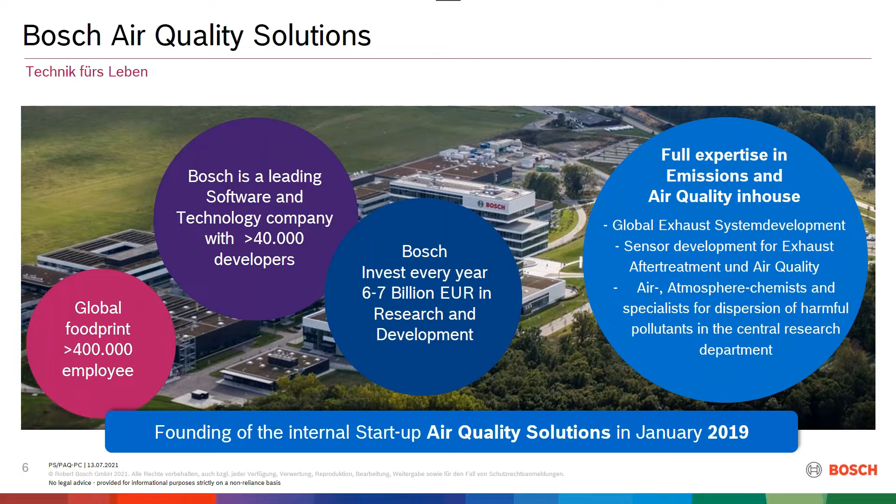In 2019, we had several projects in different parts of our company regarding air quality. We have our own exhaust system development, our own sensor development, and also air and atmospheric specialists are part of our central research. There were different products based on air quality, and we put all these projects together in the beginning of 2019, founding a so-called internal startup called Air Quality Solutions.

Within this Air Quality Solutions, we have three different products where we try to show, in regards of air quality, a holistic approach. What you see here on the slide is, on the left side, we have built up an emission model, what is really coming out of the exhaust pipe of every vehicle, which is now integrated in a first step in PTV Vissim.

But there is also an air quality box, which is a hardware, a sensor device where we can measure all harmful pollutants like particulate matter, CO, NO2, and so on, in a very accurate way.

And then in between there is the dispersion. So what is influencing the emissions, or describing the way from, let me say, the exhaust pipe to the measurement on the sidewalk. There is a dispersion calculation, which we call EcoLoop, where we calculate and model all influences from wind, weather, and air chemistry, so that we have a holistic picture coming from the sender, the emissions, up to the point where we measure air quality on the sidewalk.

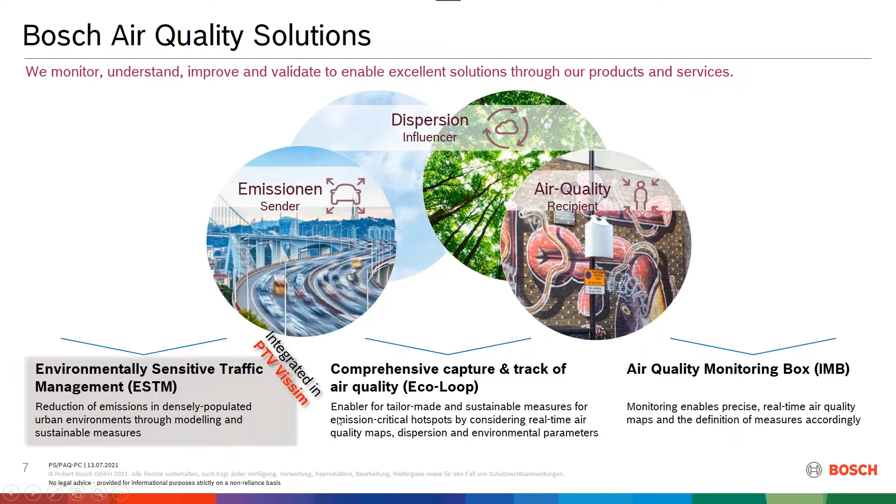Today, I will concentrate on the emission part, which is now part of PTV Vissim, and I want to show you the benefits of this product.

So the first slide shows maybe the main difference between our emission model and standard emission inventories, which you maybe know, like in the US, it's MOVES from the EPA. In Europe, we have other emission inventories like COPERT, or in Germany, especially the Handbook for Emission Factors.

And this we call macroscopic modeling. So here you see an example, this is a borough of London called Brixton, where we modeled with such a macroscopic emission inventory the emission on road segments, and you see it's quite an average value on longer distances.

And the reason for that is because these macroscopic emission models are built to evaluate wider areas and bigger areas regarding emissions from road traffic, or even not just road traffic, also industry, etc. But today I concentrate on the road emissions. And today, sometimes it's used to zoom into a single crossing, to a single corridor. But for these, emission inventories are not really suited.

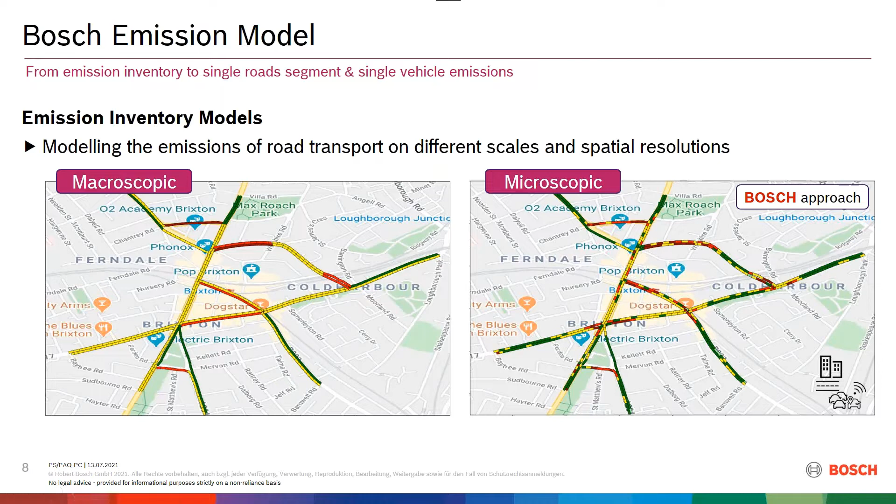The traffic situation also influences emissions. When you're driving at half the speed, it takes twice as long in this area, so it will emit twice as much emission compared to driving faster, more or less.

But from the driving dynamic side, you have a factor of 4 to 10. So driving dynamics has a much higher influence on emission than, for example, traffic volume or traffic situation.

The reason for that is exhaust systems are very good with constant driving, but when you go into transient vehicle behavior, in this case acceleration, you have more exhaust, and your catalyst has, from one second to the other, much more to do because of the higher exhaust flow.

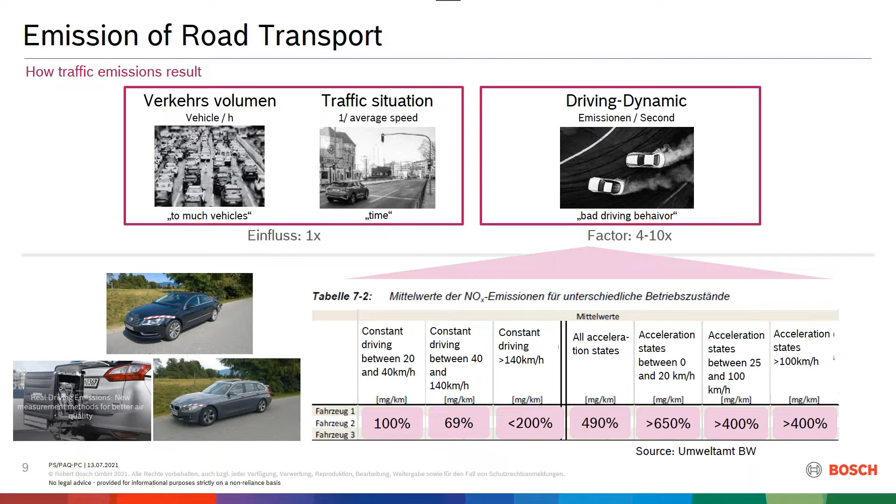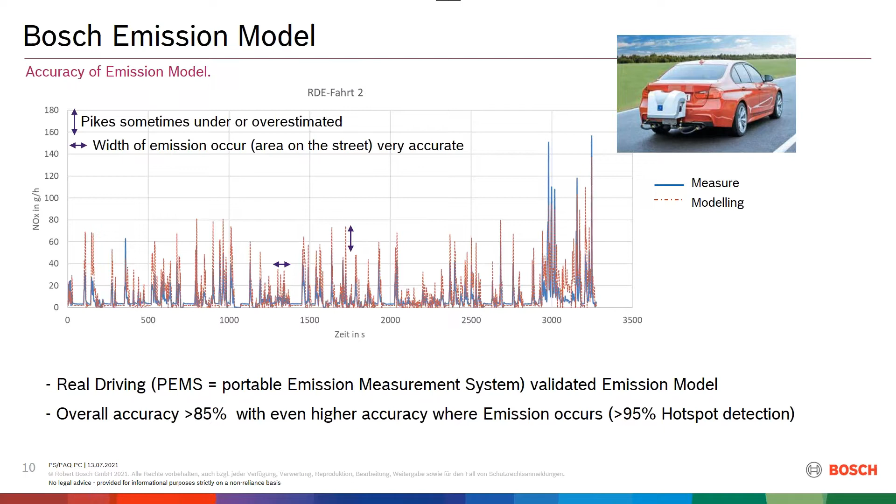So this is a real driving validated emission model using such PEM systems, and our overall accuracy per vehicle drive cycle is over 85%, and the hotspot detection is over 95%.

So, planning your traffic with PTV's microscopic simulation tool, and then also modeling your emissions with a microscopic tool, the emission model from Bosch. We did several proof of concepts and different projects together already.

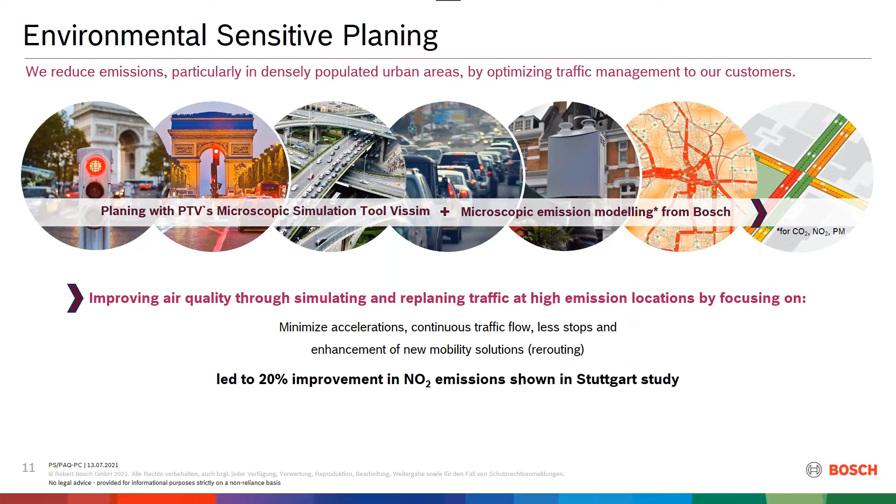One of our earliest projects was in Stuttgart, which is our hometown from Bosch, and there we got an improvement of NOx, so NO2, nitrogen dioxide, of about 20%, just by changing the driving behavior of the people. I want to tell you a little bit more about this proof of concept in Stuttgart.

There we took real driving cycles, getting the data directly from vehicle-to-X, vehicle-to-infrastructure, the data out of the vehicle.

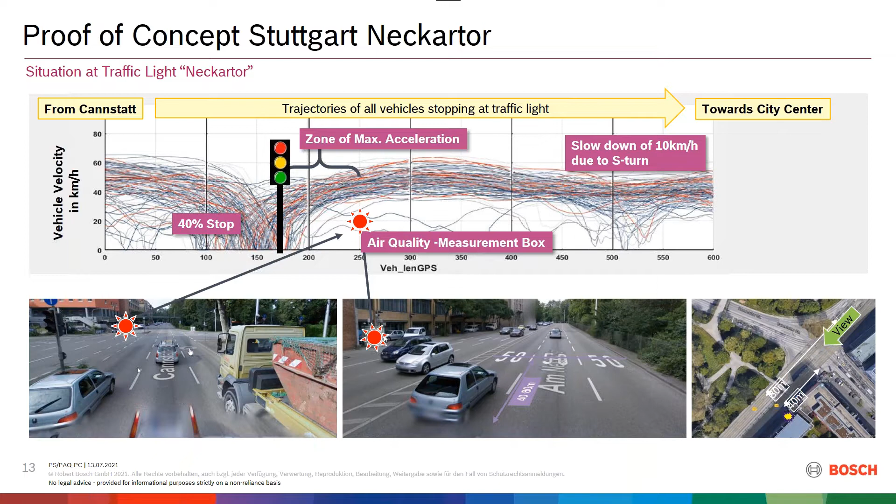The reason for that, as I mentioned before, is because it's this macroscopic approach, and the city wants additional measures to reduce emissions in this area. So we developed this microscopic approach together with the city of Stuttgart to show the real difference vehicle by vehicle in this area.

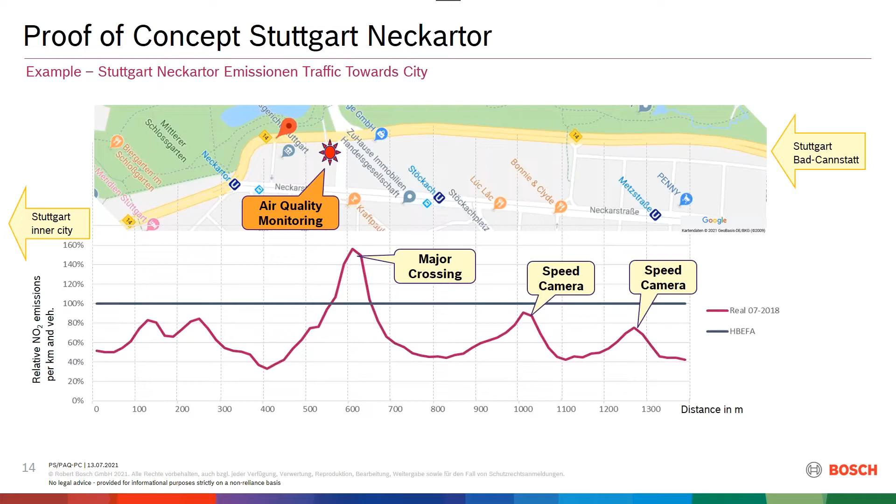We discussed measures with the city of Stuttgart, and the first idea was to reduce speed from 50 to 40 kilometers, which is quite easy, and in our opinion would lead to a driving behavior like the green line - people would not accelerate as hard as before. They would just accelerate to 40 kilometers instead of 60, and after the S-curve, which they can only drive at 40 kilometers anyway, they'd be allowed to drive faster.

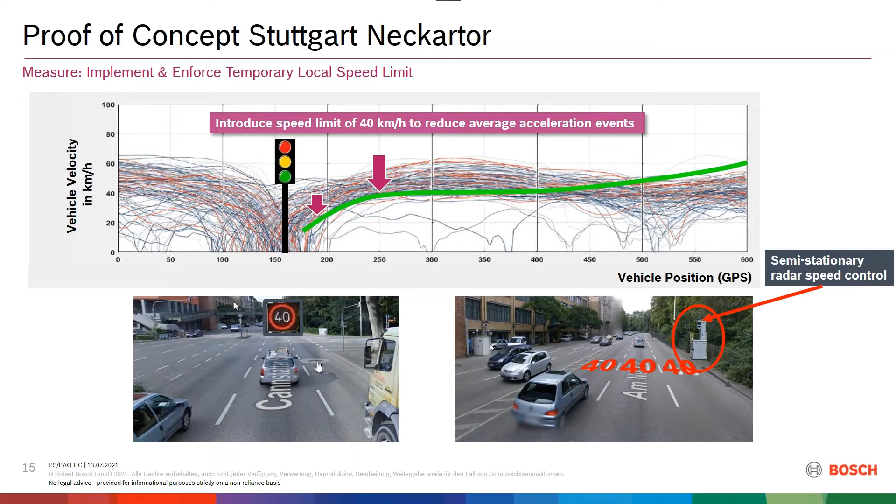So we tested this measure for about 2 months, and then ran the emission calculation again. Coming from the right side, you see the 2 peaks for the speed cameras, and they're as high as before because the measure doesn't apply in this area - it starts at the main crossing. So even measuring the emissions again 2-3 months later, it's the same driving behavior and the same emissions calculated by our model.

Then we noticed at 700 meters an additional, I wouldn't call it a peak, but higher emissions. At the same time as our trial, they implemented a new bus line, and this bus has to merge into normal traffic at this position every 5 minutes. So they added a traffic light there that switches to red every 5 minutes, causing 5% of people to stop, which leads to 5% acceleration and this higher emission. Even such microscopic changes in traffic can be investigated here.

Then again the peak appears, but it drops much earlier. Looking at the driving behavior, people unfortunately still accelerate as fast as before, but they stop accelerating earlier at 40 kilometers per hour. That's why this peak has the same gradient but drops much earlier - because they stop accelerating sooner. So we see a high benefit here, especially at the worst spot, where the measurement station is located.

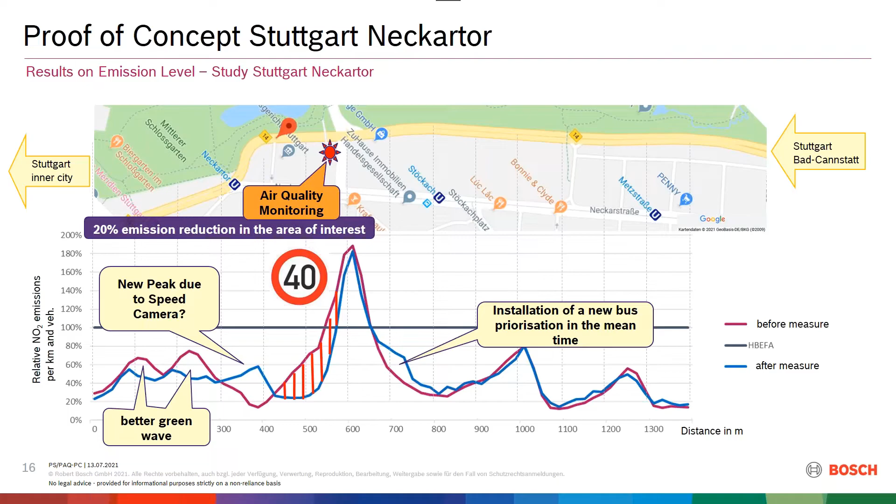So I'll take over. Thank you very much, Eric. And I will show now how it's been used in Vissim. My name is Jochen Lohmiller, I have worked for PTV for 7 years, and I'm mainly responsible for the Vissim product development.

So what was our motivation to do that in Vissim? Well, first, emissions are getting more attention. Specifically in Europe, this is a very hot topic, but of course also in the US and in other parts of the world, like climate change and everything. And also pollution in cities is a big topic, and also where we expect funding taking place for having more sustainable traffic management. There's a lack of integrated solutions.

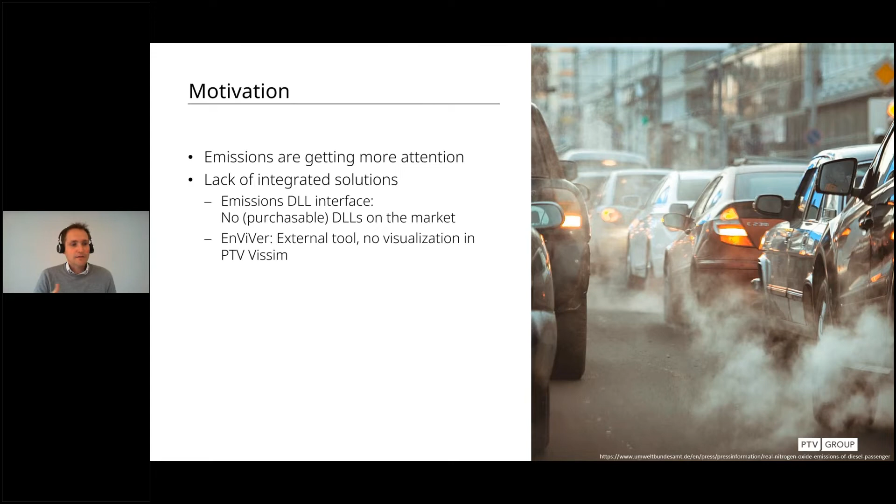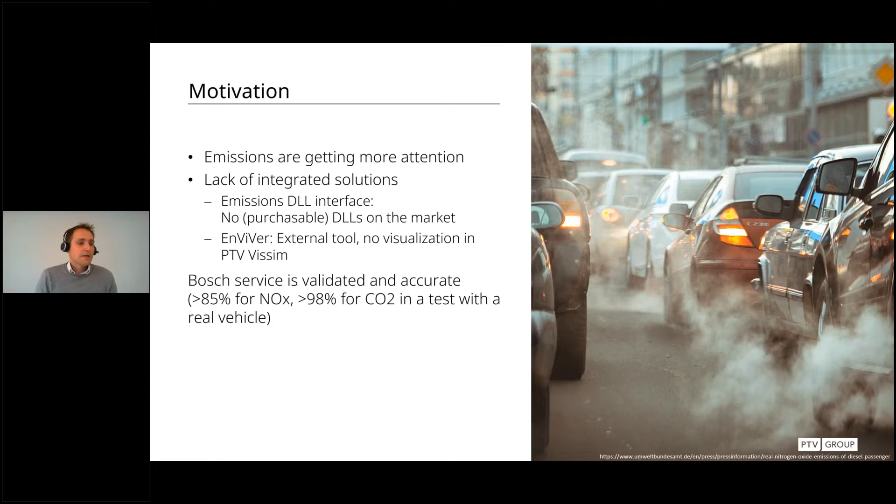So we have an emission DLL. So if you want to program your own emissions model, you can do that. But of course, we want to offer our customers an emission model. We do that with EnViVer, which we have done for many years, but it's an external tool, no visualization can be done in Vissim, and it's a separate product. So that's why we chose now cooperating with Bosch and their emission model, because it can be integrated and it's very accurate, as Eric was just explaining.

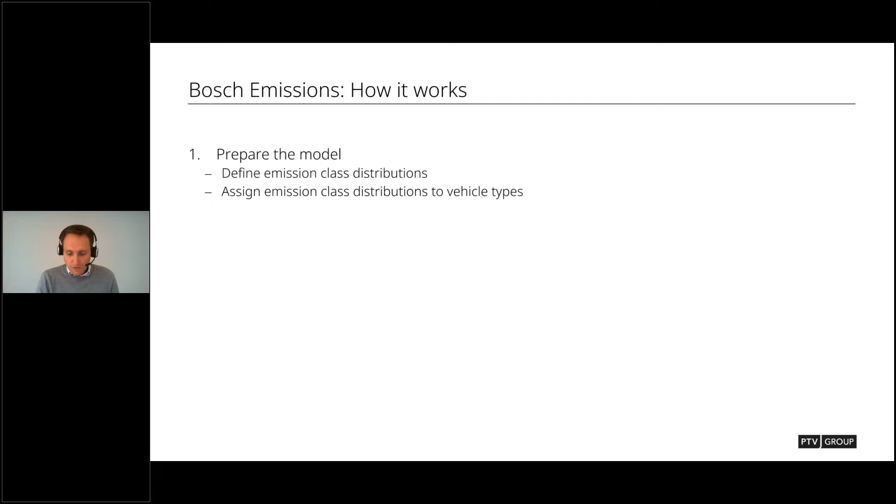So how does it work in Vissim? First, you just need to prepare your model. Additionally, what is needed is to define emission class distributions. Emission class distribution is something like, what kind of vehicles do you have? How old are they? How good? How much do they pollute? Which model year? Gasoline, diesel, this information, and then assign these emission class distributions to vehicle types. I'll show you that in a minute live in Vissim.

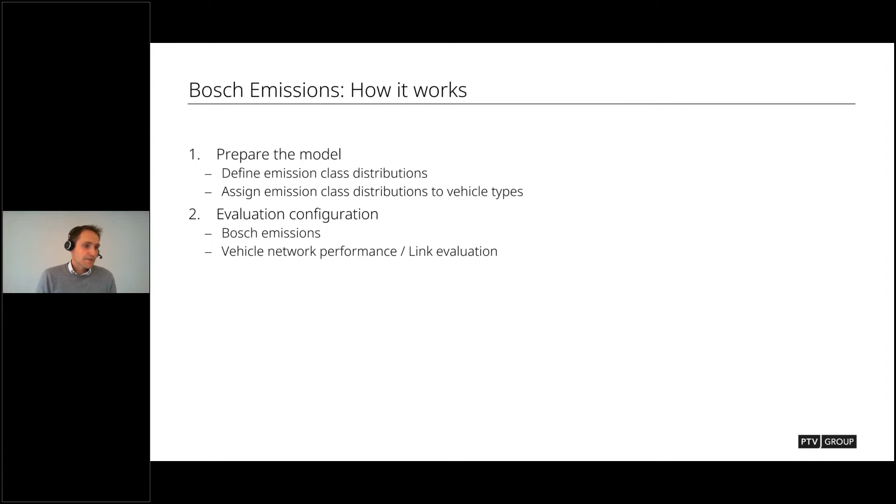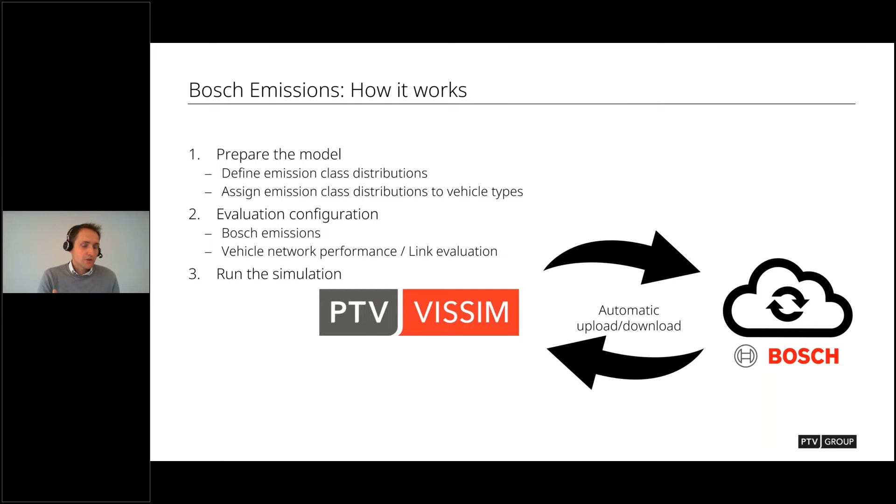And then you just need to activate, okay, I want to have Bosch emissions evaluated, and activate either link evaluation or vehicle network performance. And then you just run the simulation. After the simulation, Vissim will upload to the Bosch cloud all the trajectories, information about the vehicles, the emission class, the gradients on the route, and then download the emission results. And then you have them back in Vissim and can use them to analyze and visualize results. And we'll just do that.

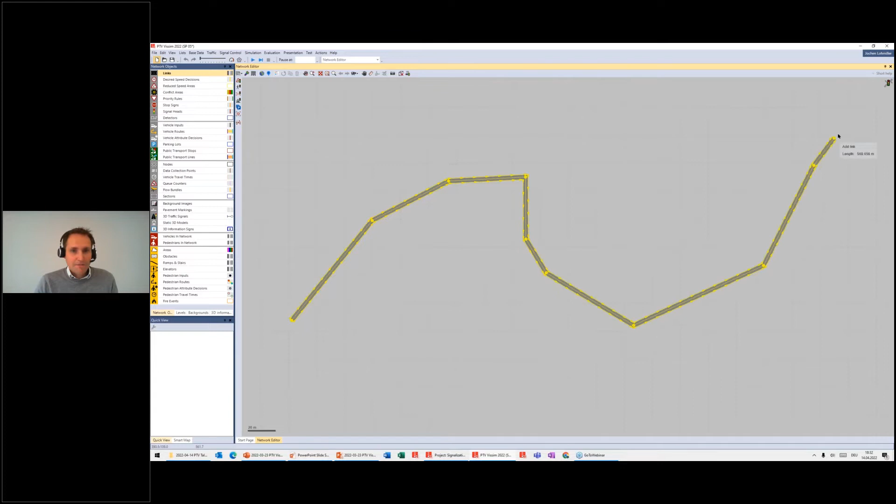So this is a very new Vissim network. We'll just make any network, it's just an example network. Maybe add some spline points so that it doesn't look so edgy. So this is our route, and on that route we'll just put vehicles, in that case 700 vehicles per hour. And now, because of emissions, we'll just put maybe 2 stop signs so that vehicles need to stop and to accelerate again, and hopefully we'll see emissions there.

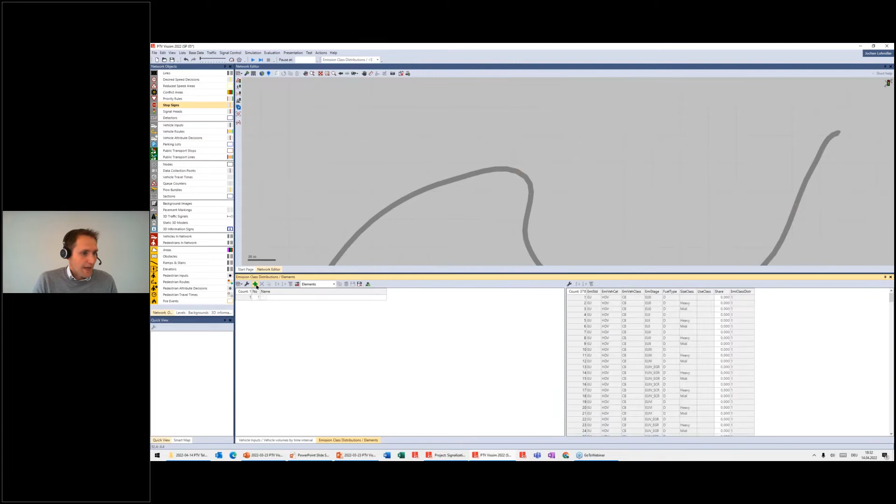So as I was just saying, there is a new object in Vissim, the emission class distribution here. So this is a new network object, and if you add one, you'll get a list. That's a specific emission class distribution with 300 elements. So we have here emission standard EU, and there we have all the Euro norm classes. And also we have here the US as emission standard.

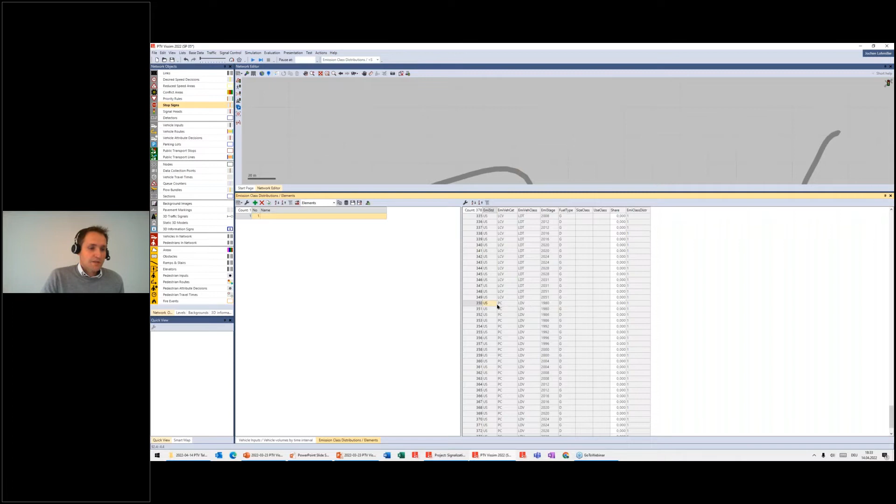And there we also support the different vehicle categories, heavy duty vehicles like commercial vehicles, passenger cars, and also emission-free is there. And you see here all the emission stages, the year, so how old they are, and then diesel or gasoline. And if you have these data, you can enter them here. So for example, you have passenger cars with the class light duty vehicle from 1980, that's probably 10%, diesel, then 92, that's 20%. I think you know that concept from Vissim. So you can provide and enter your emission class distribution.

And what happens is, if Vissim then creates a vehicle of a type which has this emission class distribution assigned, it takes from that distribution one specific emission class. So now it's 2 times more likely that the vehicle being generated will be a light duty vehicle from 1992 compared to 80.

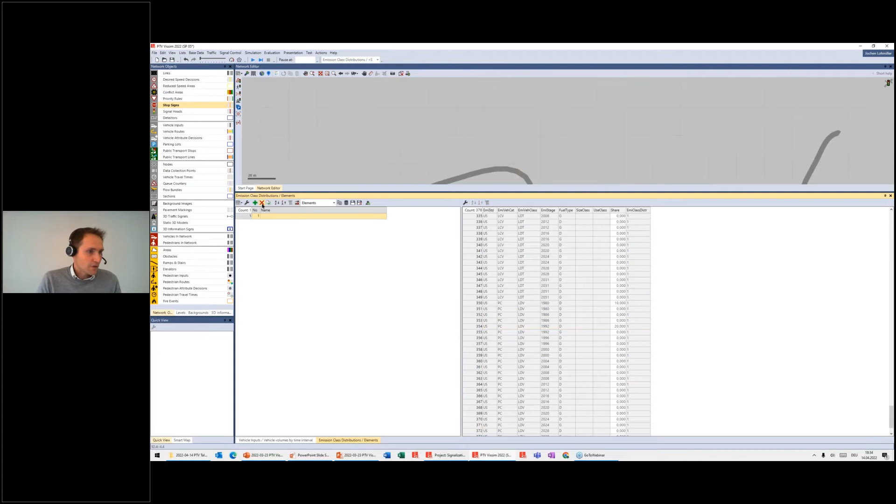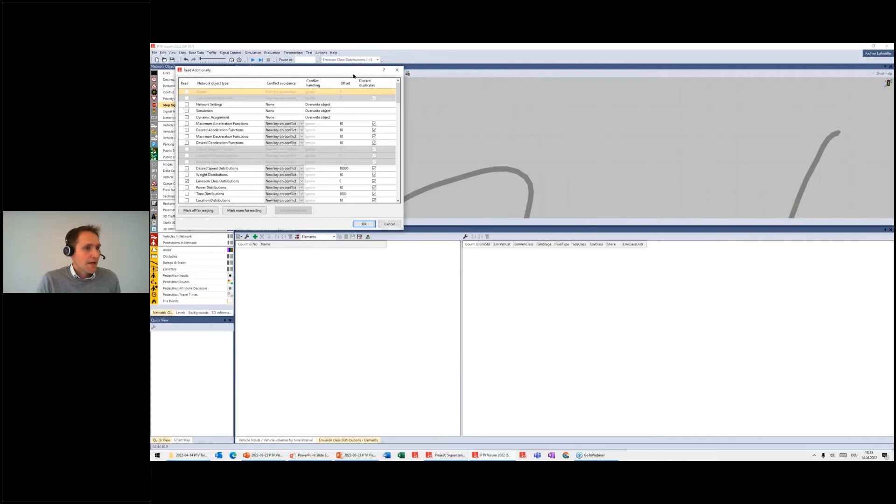I would assume most of you don't have this data, model year and everything. That's why both for Europe and also for the US, we provide an example file. So if you click on File, Read Additionally, a network, then you can choose here in your examples training folder, and here vehicle fleet and settings, you'll find 2 emission class distributions, US and HBEFA, which is the European one. So you can select the US one, open it, and then say what you want to read additionally.

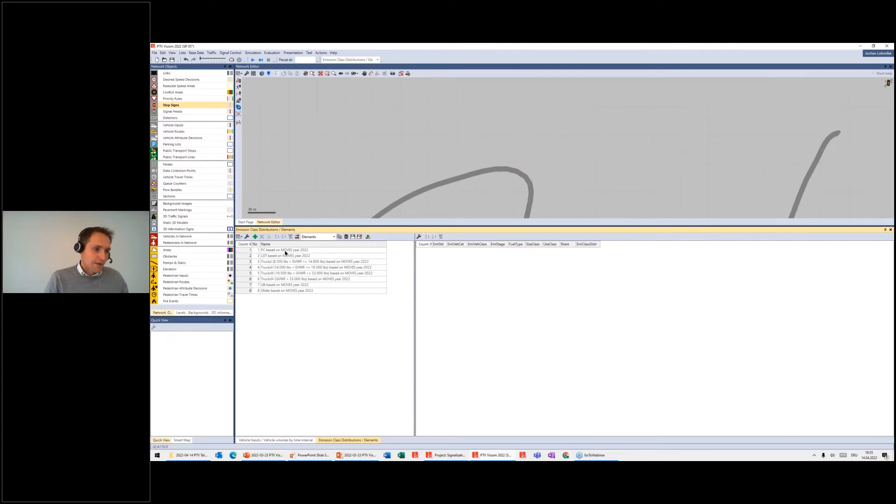If you click none for reading and then only click the emission class distribution, then these US emission class distributions are imported. We're not claiming we're 100% correct with that, but we looked at the MOVES database, and there were some assumptions we needed to take, but we derived this emission class distribution from MOVES data, which should somehow represent a vehicle distribution over all the US.

It might be inaccurate if you model a city or a rural area in Texas compared to the Washington, DC urban area. There you have, of course, a different emission class distribution of vehicles driving there, but then it's up to you to adjust these assumptions. So what you find there is, for example, passenger cars based on MOVES year 2022. And if we filter here to the ones that do not equal 0, you'll see all passenger cars, light duty vehicles, and then the different years, diesel and gasoline.

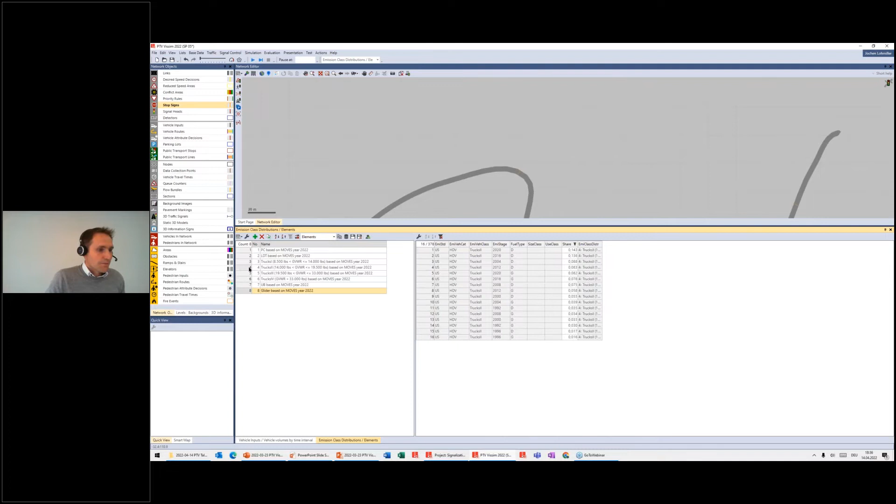And if we sort that, the most common is the 2022 gasoline, then the 2016 gasoline, 2012, and so on. And you see here the percentage of it. And the same for the different trucks with different weights, urban buses, and also gliders here. So you have them, and you can just import them from these example files, and if needed, adjust them.

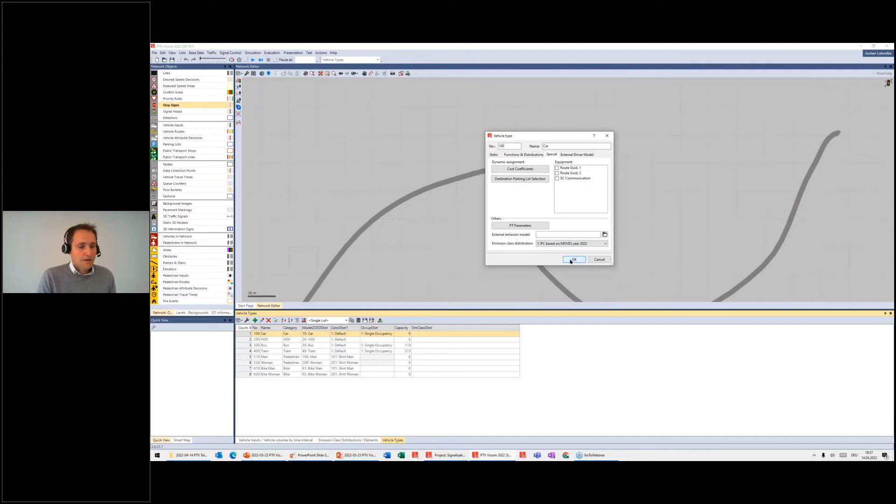So the next step, which I was showing, was then in the vehicle types. Here, there is an additional attribute now. You can do that in the dialog: go to special, emission class distribution, and assign, for example, to car, passenger car. I've already opened these attributes here. You can do that, of course, also in the list. So for HGV, let's say we're simulating an urban area. There you have smaller trucks, so we use trucks 1. And here for buses, we select urban bus.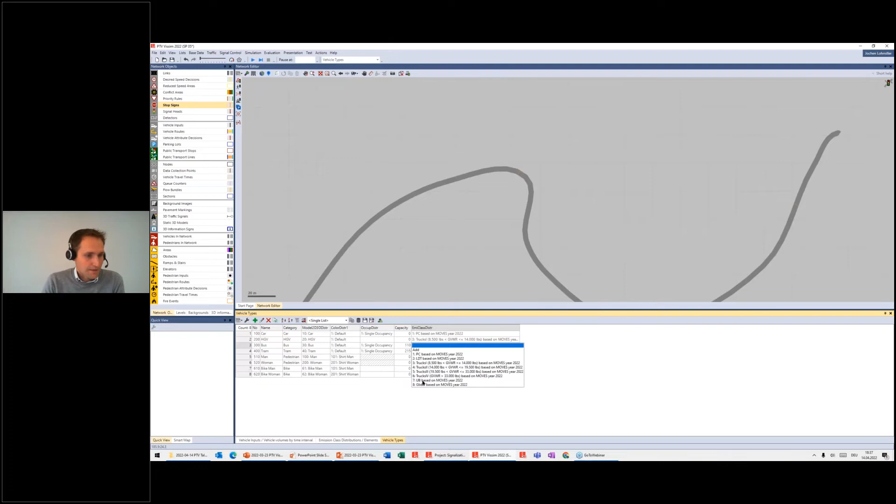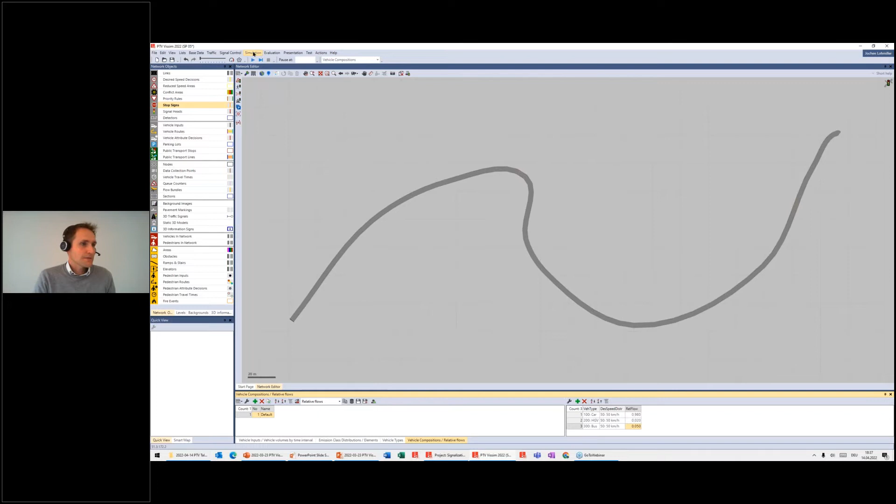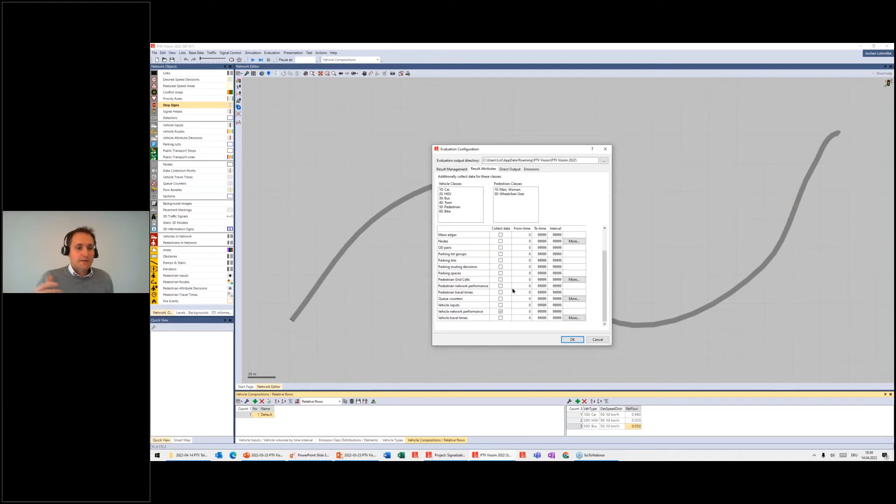I think in the standard vehicle composition, we don't even have buses. So let's add some buses here, maybe some percentage. Okay, so now we have set everything. First, emission class distribution. Second, assign the emission class distribution to the vehicle types. And thirdly, in evaluation configuration, there's a new tab, emission: activate Bosch emission calculation. And from the result attributes, make sure you have vehicle network performance and/or links activated. If you don't have one of these 2 activated, because these are the only evaluations where we store emission results, then you will not get any emission calculation, even though Bosch emission is activated. So that would need to be clicked as well.

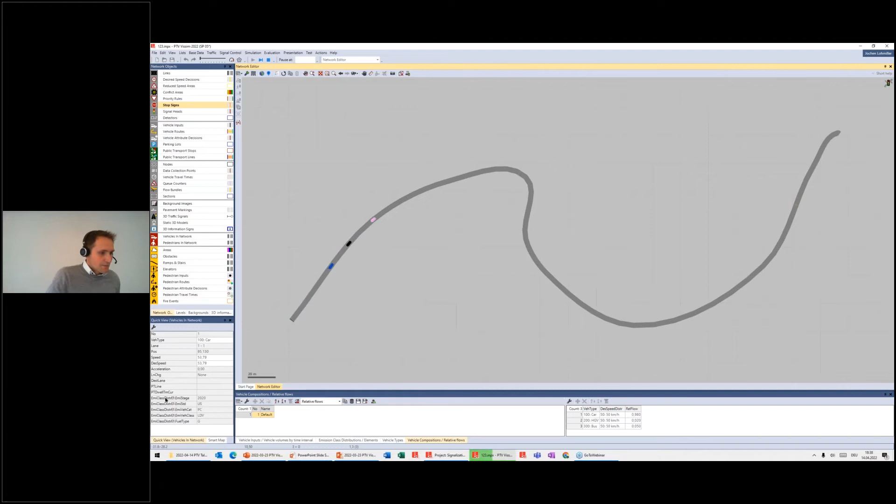So I think we're all set. We'll start the simulation. Save it as standard 1, 2, 3. And then we'll see the first vehicles coming in. And if we look at these vehicles, here I've already selected the emission class distribution. And you see this one, which I highlighted. This is now a passenger car, gasoline, model year 2020.

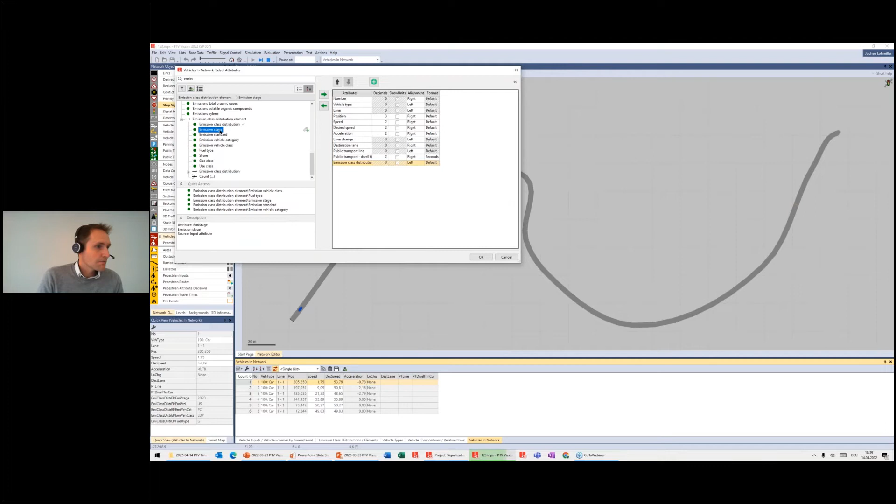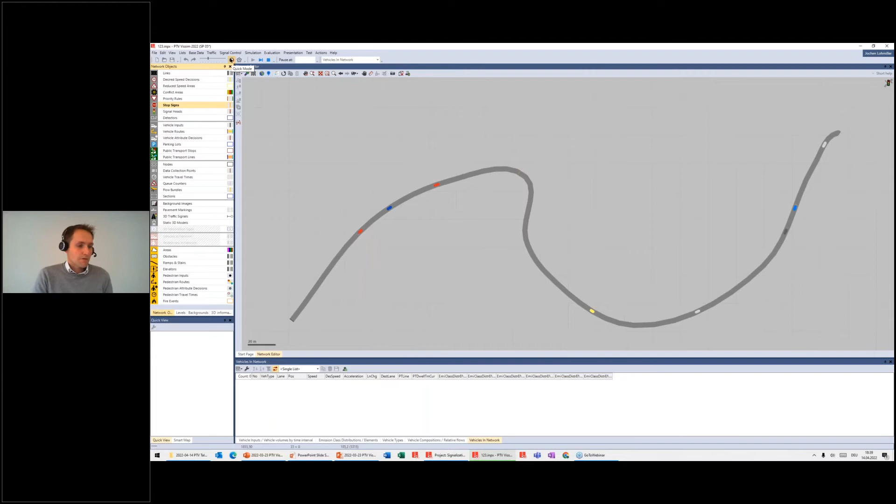Maybe we should cut that down a little bit, because then also the emission calculation. Let's stop and just change it to 600 seconds only, just for the demo purpose. Start the simulation again. So just have the 600 seconds being simulated.

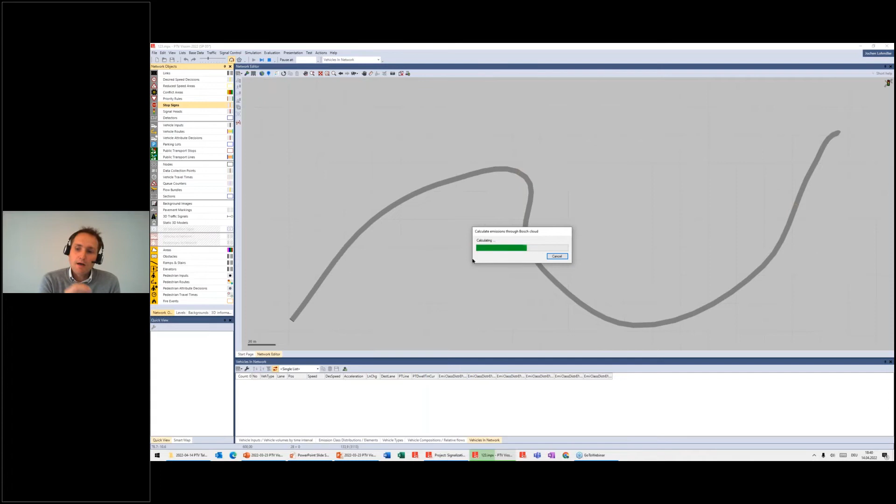So now all the trajectories have been stored internally and are now being uploaded to the Bosch cloud. And Bosch is calculating the emissions based on each and every individual vehicle trajectory. These emissions come back on a vehicle level. And once we have them, we aggregate them into your link evaluations, so into the link segments, depending of course how long they are and what time intervals you have set. And so now it's done.

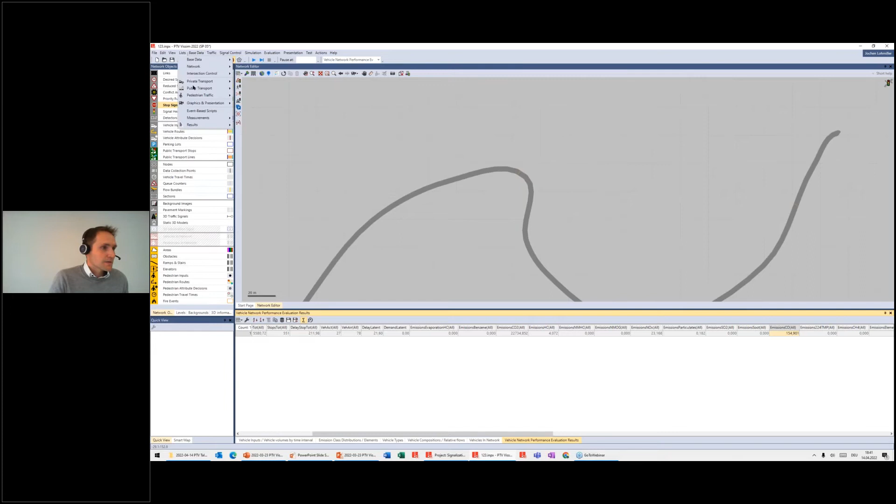So if we look at Lists, Results, Network Performance Vehicles, there you see we have more emission attributes in case you want to have your own emission calculation, but CO2, HC, NOx, that comes from Bosch. So that is for the entire network. And in the link results, so Lists, Results, Link Results, you'll see these emissions based on the link segments. So every 40 to 50 meters, there you have these emissions.

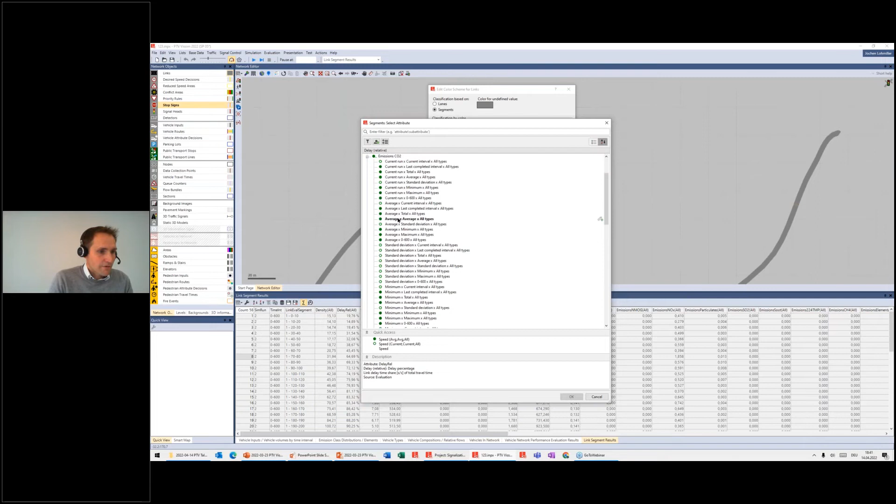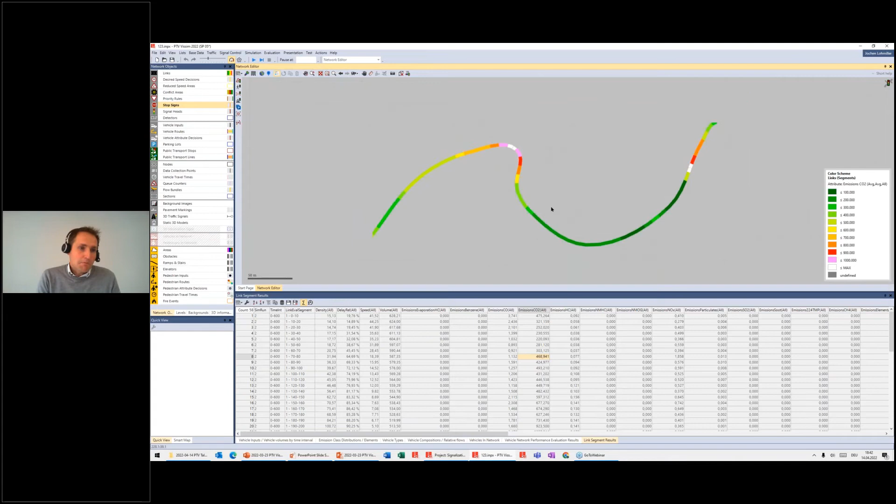And then we see here the CO2 emissions, where they are. And as expected, here's a stop sign. Before the stop, there is some emission because we have vehicles waiting. And then after the stop sign, they are accelerating again, and this is where we see emissions. Here, if they are driving fast and not accelerating, in this area you see not so much.

So as Eric was showing in his Stuttgart example, you can do such an evaluation yourself, but not in the real world as they have been doing. You can do that already in simulation. Just change something, put radars or a speed bump somewhere, and see how it will affect emissions where they are located compared to the base scenario. This is what you can do.

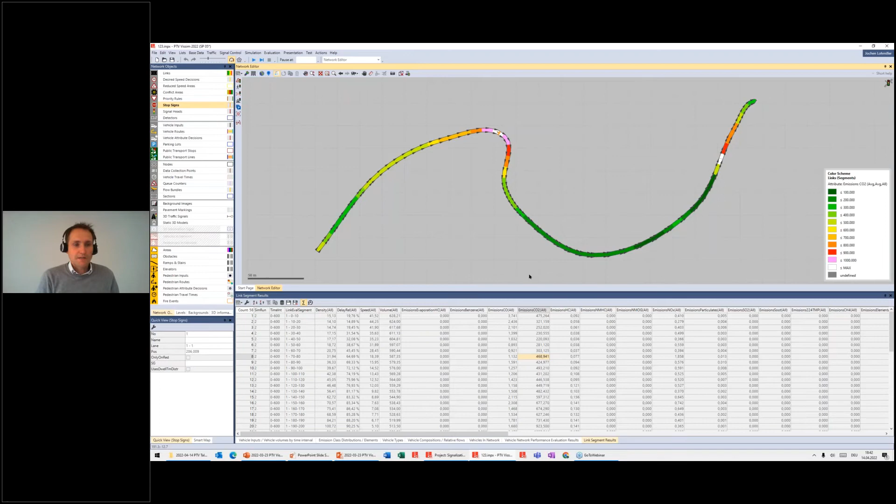And similarly, as you show traffic KPIs, you can also switch to showing CO2, as I have just done in this other example, or showing particles where they are, or NOx. All that can be done, set up and shown.

And in terms of scenario management, I just had the idea, okay, what if I would introduce a speed limit of 25 miles per hour everywhere in this network? There were already links with 25 miles per hour, but what if I do the speed limit everywhere? I thought, okay, at 25 miles per hour I don't need to accelerate that much because I don't accelerate to maybe 30, 35 miles per hour. Could save some emissions, but I'm just a transport engineer. I don't know exactly.

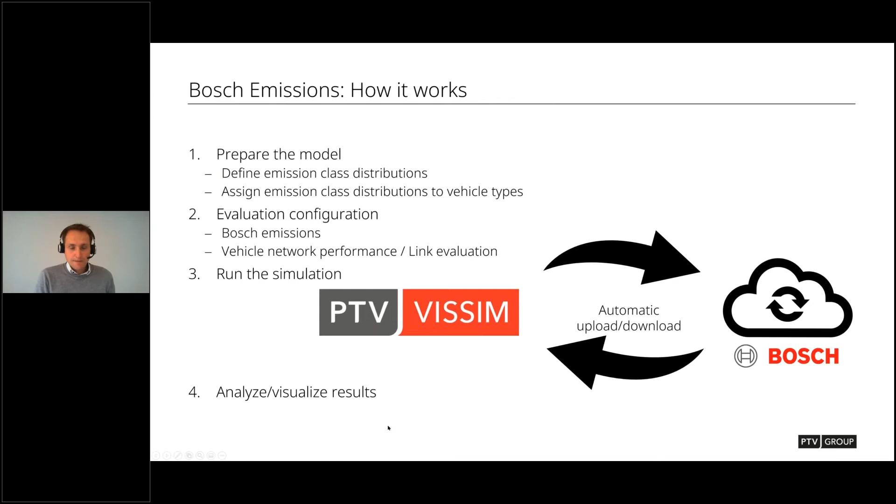So this is how it works, and yeah, we think it's rather easy to use.

Some notes on the methods. Currently, vehicles are assumed to start with a cold engine. The emission calculation is very advanced, so the longer the vehicle drives, they take the different heat of the engine and the catalysator into account, and that has, of course, an effect on the emission results. So when vehicles are entering the network and you want them having a warm engine, plan for 1 to 2 minutes of warm up.

We're currently thinking and discussing if we might change that, because often in microsimulation models, you don't simulate the whole trip from the origin to the destination. So it could make more sense to start with a warm start, but it's something we currently discuss. Emissions are affected by the gradients, so make sure you model gradients in there, and it's also sent to the Bosch Cloud.

Emissions are sensitive to acceleration. I've seen some Vissim models where they used acceleration for calibrating towards something. And of course, if you take too much acceleration and deceleration, that will have an impact on emissions. So make sure your accelerations are about right.

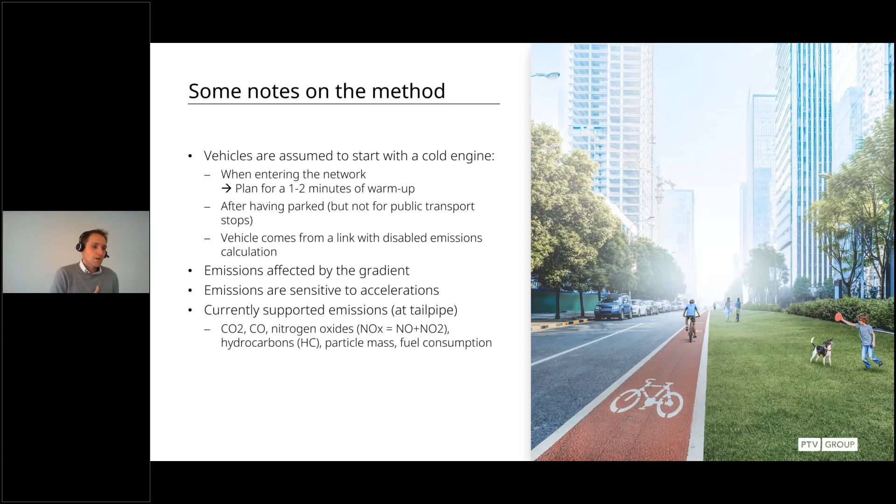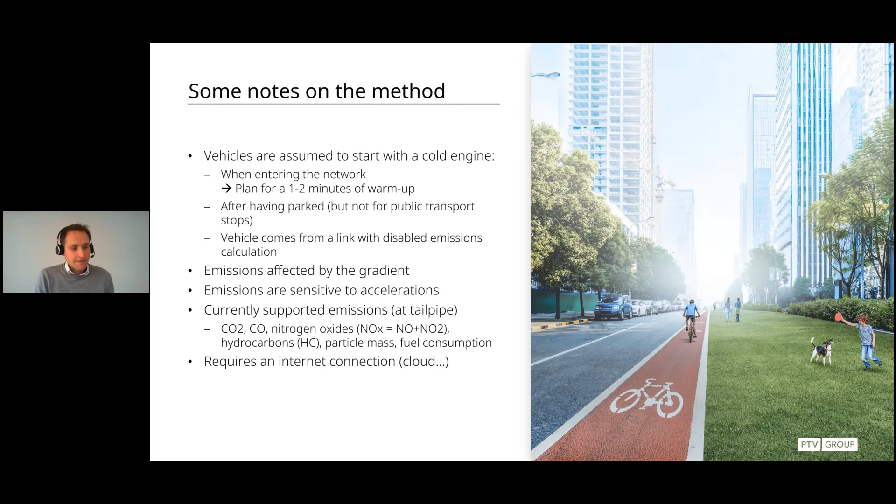The currently supported emissions, as you have seen in the Vissim model, are CO2, CO, NOx, HC, particle mass, and fuel consumption as well. It requires an internet connection because it's a cloud product. And then you can make use of the emissions in the vehicle network performance and the link evaluation, and use them in lists, visualization, charts, video recording, scenario comparison, everything you know from Vissim.

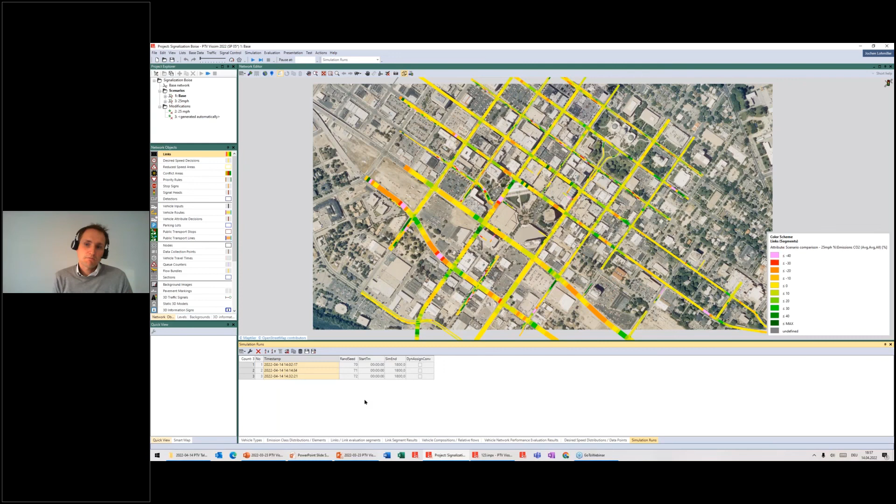These are the simulation runs. So I started the simulation at 2 o'clock, and then it took 12 minutes for the first one, and about 16, 17 for the second run. So about that time it took for running the simulation and doing the emission calculation. So half an hour of simulated time takes about 10 minutes for that model, real time. Great.

Do you report idle emissions? Idle emission, yes, is that idling? So when the vehicle stands still, we don't take start-stop systems into account at the moment. But when a vehicle stands still, even over a longer period, and you simulate it like this, then we also take into account idling emissions.